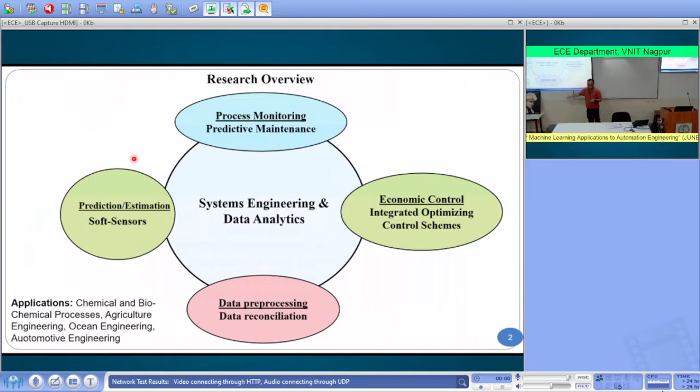So we have a unit, a process or a reactor, let's suppose a nuclear reactor through which you're trying to manufacture something. So you have a process or a plant, and in order to optimize it, keep it safe, control or maintain that process, you need measurements, right? You need to take some information from it.

You need to keep taking some information. So the layer that you have immediately after the process, attached to it, is something called measurement and actuation, which takes the measurements from the process and tries to understand the behavior. Let's suppose you go to a hospital with a certain amount of fever or whatever condition you have. The first thing is that they will put a thermometer in, right? So that you know the condition of your body, what the status of your temperature is.

So like that you have some sensors here, measurement and actuation: what is the temperature of the reactor, the pressure of the reactor, the different conditions. So you have sensors and actuation directly mounted on any particular reactor. From there, the first layer is the safety logic. Let's suppose in a nuclear reactor the temperature is shooting up. The first thing that comes in is the safety logic, meaning a valve is opened immediately without any delay.

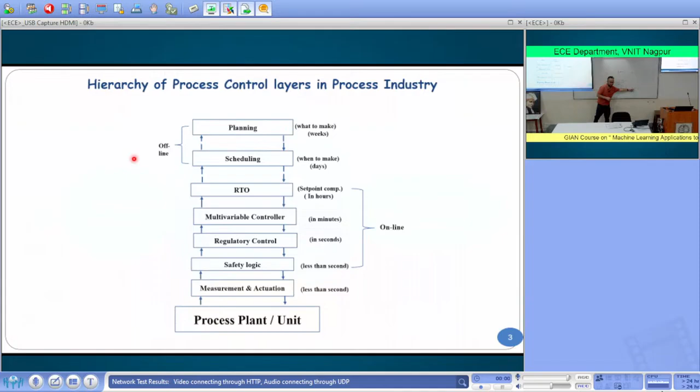Is this clear? The soft sensor is a supervised model which you plug into your computer: take the historical data, train the model, put it in your computer, send the same inputs given to the process to your computer, and get real-time predictions. And you monitor these real-time predictions.

So now comes the problem. If you have one reactor, it's fine. If you have one reactor, developing a model is simple. I think chemical engineers can get into this part easily. So if you have one simple reactor, I want to predict an output.

So what is the problem of first principles model? I had an introduction of first principles model. We call it first principles model in other domains. Use your physics, means physics. Let's suppose you're an electronics engineer or electrical engineer. You use your physics to model a certain system, right? Actually, physics-based models, mass balance, energy balance equations, okay?

So let's suppose you have one particular reactor, a simple reactor, and you have an input and an output which is coming. So there is some process undergoing. If it is one reactor, I can use my entire BTech chemical engineering, whatever I've done, the fundamentals, mass balance, physics. I'm going to look at the physics part, not at the data, understand the behavior of it, and come up with a certain model of how the variable in the reactor is changing with respect to time. So I can get some differential equations by using mass balance.

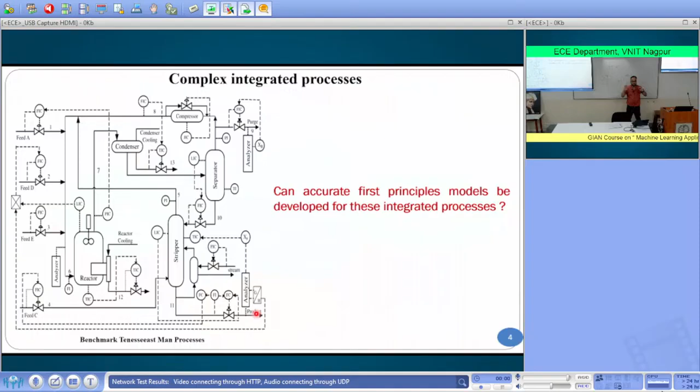So now you have an idea of the importance of soft sensors. In a controller, let's suppose you're trying to control a feedback. For those who are non-domain, who don't have any idea of control, I'll tell you, I think you have an idea but never saw it. Now the temperatures are going down, right? It's becoming cooler. So when you go for a shower, what is the first thing you do in the morning?

When you go for a shower to take water, what is the first thing you do? Temperature check. You open the valve, take the temperature reading, you sense it, and based on that what do you do? Adjust the temperature. You keep changing the valve position, how much of the hot water and cold water, and you keep both open and try to adjust how much the valve has to be opened or closed by sensing it. You are sensing it and closing it, sensing it and manipulating it. It's a feedback loop.

Your brain is your controller, and you are trying to sense it through your hand and you are manipulating it. The valve is manipulated, you are manipulating, it's a closed loop controller, like in the case of agriculture. Let's suppose you have agriculture systems, how much water has to be supplied to an agricultural field? How do you know?

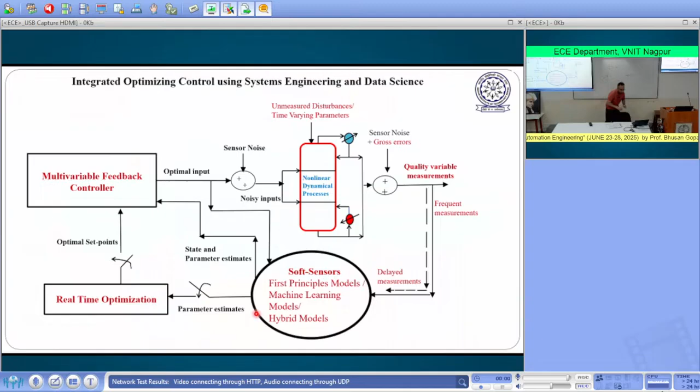Okay, so I'm just planning to give an outline of the presentation, or the next day's talk, whatever I am planning to do. I think the importance of soft sensors we covered, and the classification of sensors.

We'll start with a simple regression model. We'll see how, for this particular process, you develop a simple regression model. I think regression has already been touched upon. But we'll see what is data preprocessing, how do you do it for a regression, and what are the problems associated with regression, like how he was mentioning about data not coming neat.

So what if your data is bad? Can a regression model be modified? Can a simple regression model be sustained if data has noisy data? How do you modify these regression models? So regression models are not adaptive to it. You need to make your regression models into a probabilistic sense.

Okay, so whatever we have looked at in the last classes is more into deterministic regression. You did not assign any randomness to your estimates, kind of. It's more on the deterministic part. We'll look into more of the probabilistic sense.

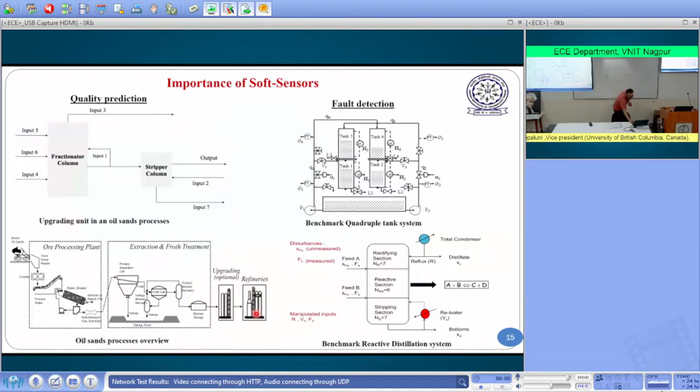So the same regression problem we can take and try to formulate as a likelihood problem, called maximum likelihood estimation, and then we will see something called probabilistic graphical models. What if you know how the output is affected? Let me just give a motivation and leave it to you.

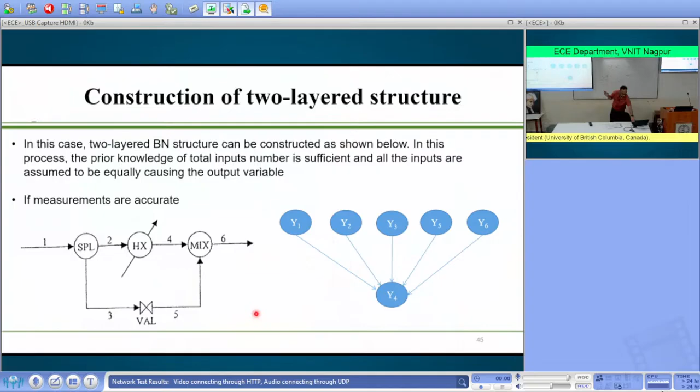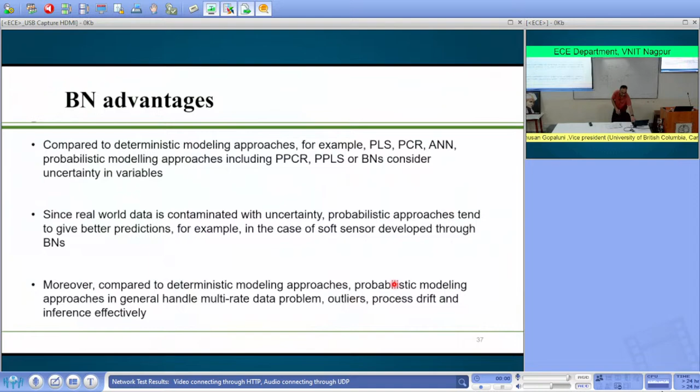So this is called a kind of hybrid model or graphical models. We are going to discuss how you use this structure, coming up with different structures. Rather than just fitting a simple regression model, can you use some knowledge from the process flow diagram or process information, flow information, and fit a regression model accordingly? This can address issues of noisy data, outliers, and cleaning of the data - those things can be addressed.

So that's what we call probabilistic graphical models. We'll just touch upon probabilistic graphical models, which are quite intuitive - when you want to club some physics information into your process, this is one way of doing it: understanding the process flow diagram and trying to build or fit a regression model accordingly. So in the probabilistic sense, how do you do it? These are important skills for those doing research - you need to know this. Rather than getting into the deterministic part, you also need a touch of probabilistic sense, which has good advantages of addressing critical issues like noisy data and outliers in the data.

So it will be more theoretical - we may derive some things, which can be helpful in the later part.

So I think, you guys want to - should I take some more time? You can take it. Okay, I think I'll just take 10 minutes. I think at 4:45 we can stop. I think maybe tomorrow morning we can go.

So this is just to motivate why we need soft sensors or predictive models: hardware analyzers, which are used in real process industries, are quite expensive - they may cost crores. I want to reduce that cost. Can I use the data available in historical databases? That's the main motive of predictive models or soft sensors - can I use the data available in historical data and come up with predictive models?

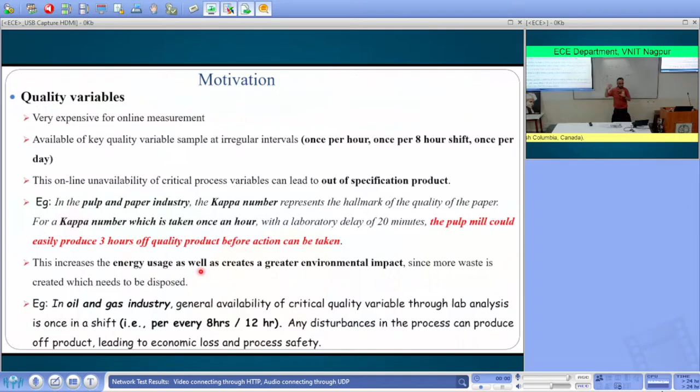So soft sensors are classified into three types. One is data-driven, one is model-based. Model-based is what we call physics: you use the physics knowledge of your own engineering domain, and those are called model-based soft sensors or first principles. And the last one is called gray box. The first one, data-driven, is called black box.

You don't see anything, right? It's input and output; you have no understanding of the process. You are just looking at the data and trying to find a correlation. These are called black box models. The second one is first principles, physics-based models, or model-based soft sensors. And the last one is gray box, meaning you are mixing physics and data. So I have some understanding and some lack of understanding of the process. That's called gray box models.

So the benefits are huge. I will show some examples. Maybe at the end of the session tomorrow, we'll have some industrial case studies where we show how much predictive models can impact an industry. These are simple regression models, but if you make them well, they can impact industry in billions. They can save billions.

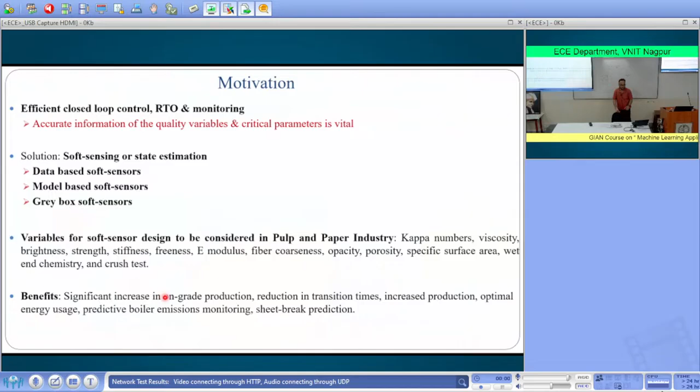Generally you have analyzers. Analyzers are hardware equipment which can measure critical quality composition variables, but they're very expensive. So in order to avoid this, one wants to shift to data-driven soft sensors, because analyzers are very costly. Those who have any background in refineries, who have gone for internships, can easily find these analyzers there, which are very costly. And these are hardware devices.

What if this hardware device goes bad, into maintenance? Let's suppose it is running and giving a measurement every minute; what if it goes bad? It's a hardware device with its own maintenance issues. If it is down, I have to rely only on a lab sample every 12 hours. I don't have anything in between to take any decision. No measurement is coming from the process; only one sample every 12 hours, and based on that I have to take a decision.

So let's suppose I'm refining crude oil, which has to go to refineries. Whatever I produce, if it is off spec, the entire thing is lost.

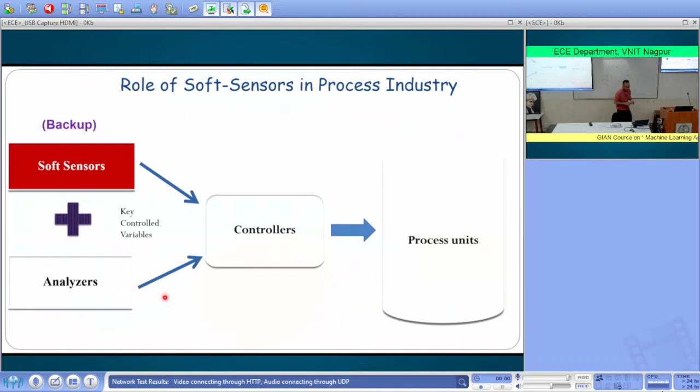Okay, I think we can stop over here. Tomorrow we will start with a simple regression and go with probabilistic. We will try to derive by hand how you can come up with a probabilistic model, and then how you convert into probabilistic models, how you come up with the network structure models. We can try with simple examples and show that. Okay.

It is not only just a data-driven model. It can be a physics-based model which can predict. It can be any sort of model: data-driven, physics-based, or a combination of both. So it's just a model which can predict a real-time measurement, actually. Yes, that's a model.

No, we don't have any layer. Like, you can have a data pre-processing layer. Generally that is done before you train the model, so we'll see how you do it. But let's suppose you have been given clean data. If your model is accurate and you validate it accurately, then I can plug it into my computer, send my real-time input conditions to the process, and actually see my process conditions.

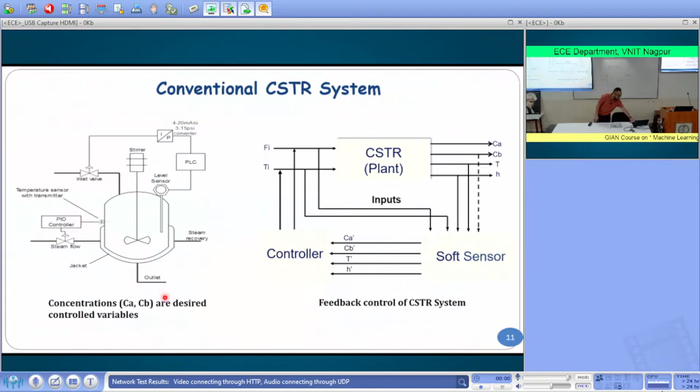this is one variable which I'm interested to predict, but there are almost 14 variables affecting it. 14 variables is quite few. In a real industrial process, if you see a flow chart, you will have hundreds of variables affecting your output. So which variables do you select as inputs? That is critical, right? Can I develop a model with 100 input variables and one output variable? Why? Good advantages or not?

Okay, that's good. What is the problem? My students are smiling. Dimensional complexity is there. Okay. Let's suppose I build a model and forget about dimensional complexity; I'll do it offline. What is the real issue I get when I implement it online?

I'll use a high-end computer. I have 100 inputs coming in; let's suppose this is my model, y equals f of u1 to u100. There are 100 inputs entering the process and I need to monitor all 100. Let's say you build a model between 100 inputs and one output, and it gives very good results. Now I put it online. What challenges do you get? Transparency. More than that, there is something else.

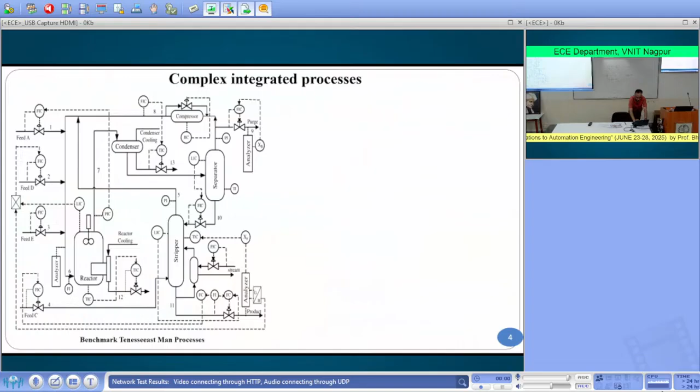Though in industry there are two plants which are different. So I think that each industry will require a different kind of model. Yes. So we can't implement one model. Oh no, you can't. System is different.

Outputs are different for this process. So we need to change the y function. No, the entire model may be changed. Let's discuss that. Let's suppose y equals ax plus b. Simple model, linear model. One input is there, one output is there.